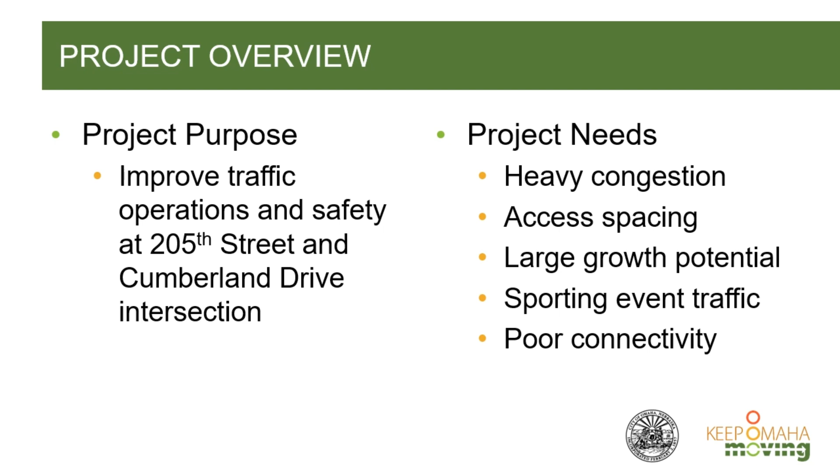Before finalizing a solution, we conducted a traffic study to determine the best way to improve this intersection. The study focused on collecting real-time data on traffic volumes and congestion, analyzing existing conditions and areas of concern, forecasting future traffic growth to ensure long-term functionality, and developing and analyzing multiple design alternatives. Through this study, we determined that a roundabout would provide the most effective and long-term solution for this location.

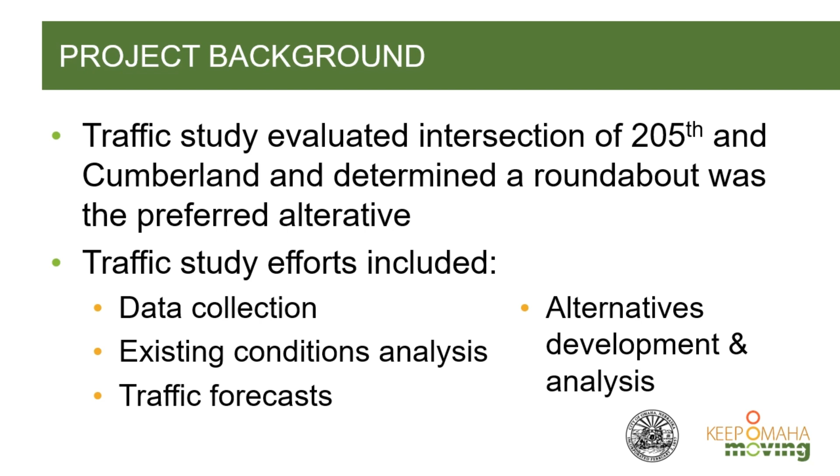Before selecting a final design, we evaluated 4 different approaches to improve the intersection. First, there's signalized 1, the small footprint, which uses a standard traffic signal at the existing intersection with no additional lanes. Next, signalized 2, the larger footprint, incorporates added turn lanes to improve capacity. We also considered roundabout 1, a small footprint roundabout, a compact multi-lane roundabout that minimizes right-of-way impacts. Lastly, roundabout 2, a large footprint, offers additional capacity with a larger design, although it requires more land to construct.

Each of these alternatives was evaluated based on its ability to improve traffic flow, enhance safety, minimize right-of-way impacts, and provide a cost-effective solution. On the next slide, we'll look at how these alternatives performed in a detailed comparison and explain why the final design was chosen.

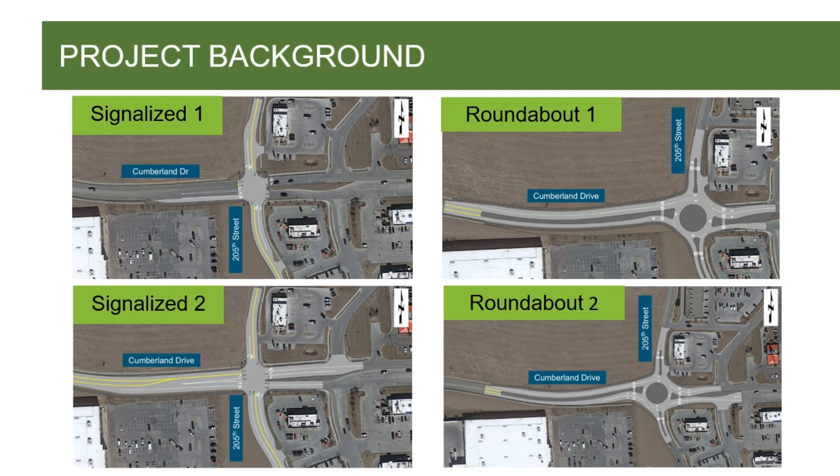Let's review how each alternative performed across several key factors: traffic operations, safety, property and right-of-way impacts, constructability, and cost. Traffic operations: how well does it manage congestion? Safety: does it reduce crashes and improve pedestrian safety? Property and right-of-way impacts: how much additional land is needed? Constructability: how complex and disruptive will construction be? Cost: is it a cost-effective solution?

Our analysis showed that both signalized options had safety concerns, as signalized intersections are more prone to high-speed crashes. Specifically, Signalized 2, the large footprint option, required significant right-of-way acquisition and came with higher costs due to the added lanes. Although Roundabout 2, the large footprint option, improved traffic flow and safety, it also had greater right-of-way and cost impacts. Overall, Roundabout 1, the small footprint option, delivered the best performance, offering safety and traffic benefits while keeping right-of-way, constructability, and cost impacts manageable.

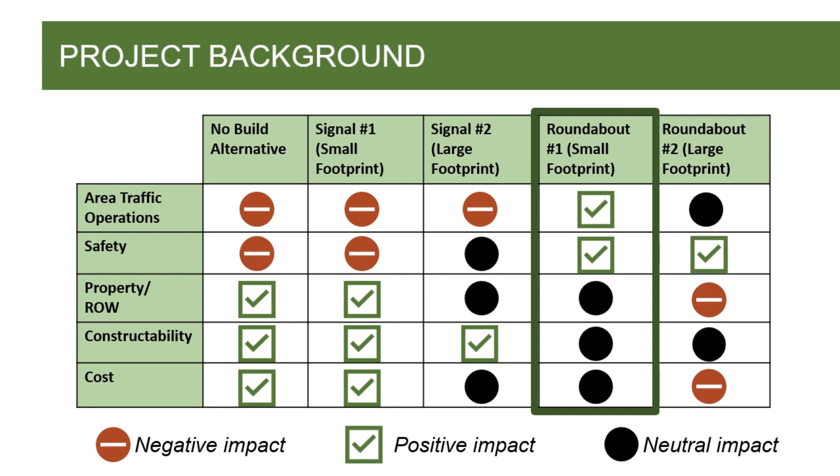Based on these findings, Roundabout 1, the small footprint roundabout, was selected as the preferred alternative. This project includes several key improvements, with the roundabout being the most significant change. In addition, the project will include sidewalk improvements to enhance pedestrian connectivity, storm sewer improvements to improve drainage, and pedestrian safety enhancements to provide safer crossings.

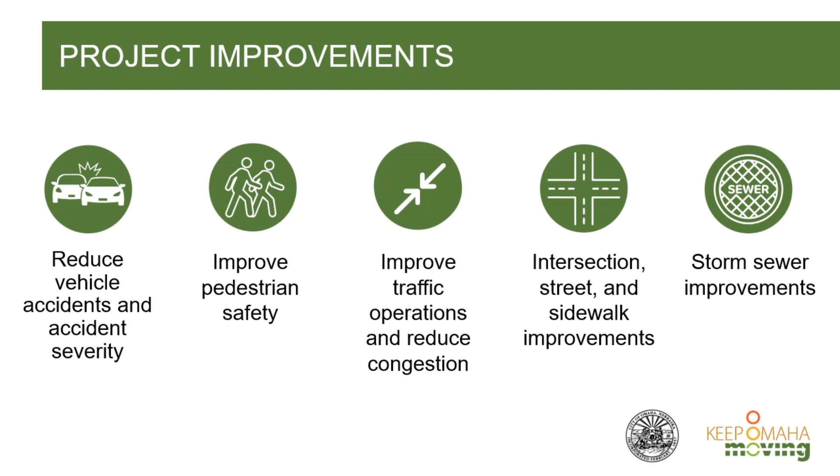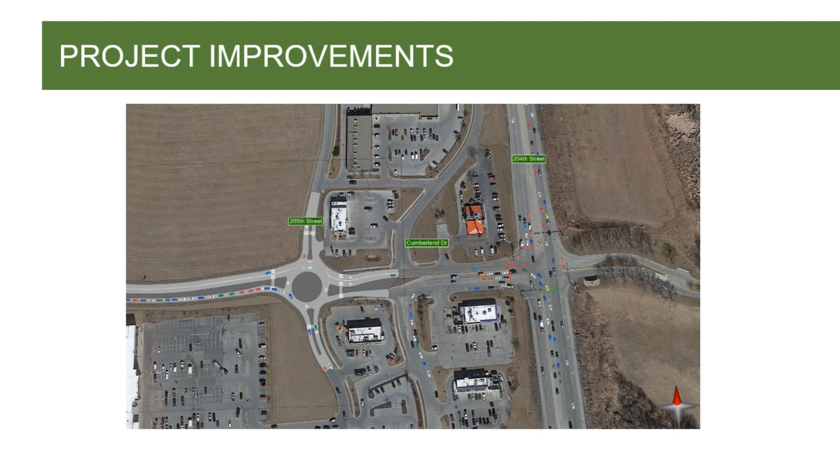Shown here is a simulation showing traffic patterns upon completion of this project. Access to the area from 204th Street and the West Dodge Road Expressway will still be served mainly from the existing signalized intersection at 204th Street and Cumberland Drive. Traffic approaching the roundabout from the east will utilize the left-hand lane to continue travel onto westbound Cumberland or circulate through the roundabout to access 205th Street south of the intersection. Traffic wishing to continue west on Cumberland or access 205th Street north of the intersection will utilize the right-hand lane approaching the intersection. All other approaches to the intersection will be single lane, allowing approaching traffic to make through or turning movements from a single access point.

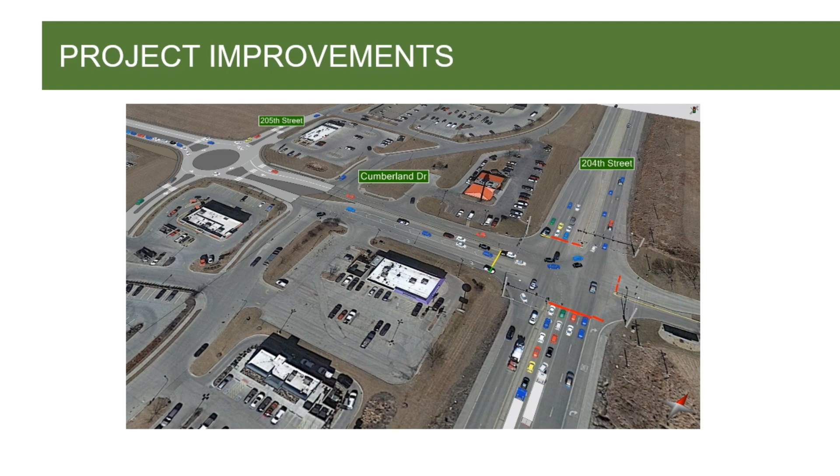Now that we've covered the planning and design improvements, let's look at the upcoming construction activities. Utility work is currently underway in the area. The contractor is scheduled to start construction on March 10, 2025. The project will proceed in two phases, which I'll detail in the following slides. Assuming no unforeseen circumstances, we expect the work to be complete by fall of 2025.

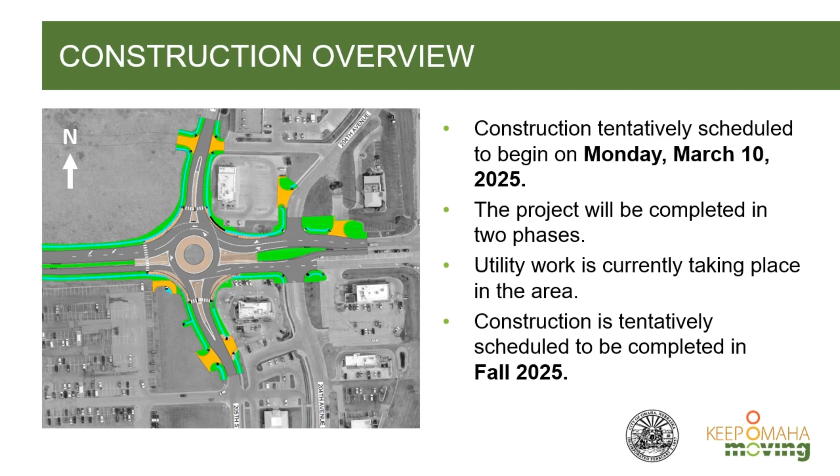Phase 1 is scheduled from March through May of 2025. This phase will require a full closure of the 204th Avenue and Cumberland intersection. Drivers will need to use 205th Street and Cumberland Drive west of 205th Street to Skyline Drive to access the area. Alternate routes will be available, and access to properties will be maintained as previously agreed.

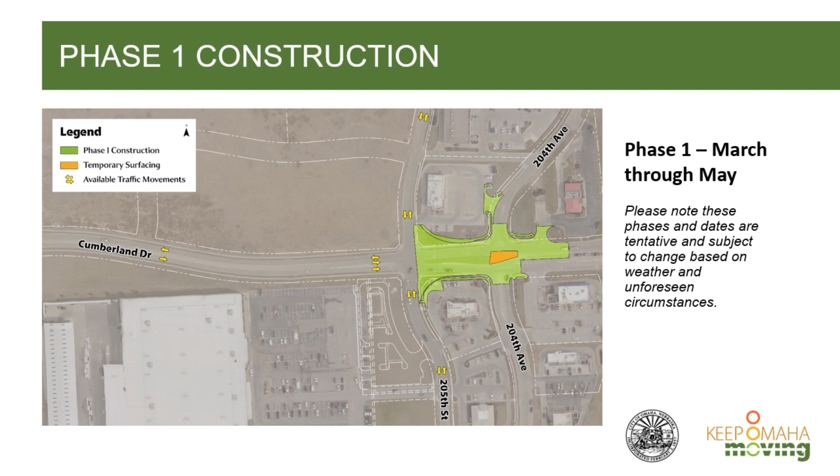Phase 2 is scheduled from April through fall of 2025. This phase will include a full closure of the 205th Street and Cumberland Drive intersection. Once Phase 1 is complete, access will shift to 204th Avenue and Cumberland Drive east to 204th Avenue. A westbound left turn from Cumberland Drive onto 204th Avenue will be allowed during this phase on a temporary basis. During each phase, access points requiring reconstruction will be individually coordinated with property owners by the project team and contractor.